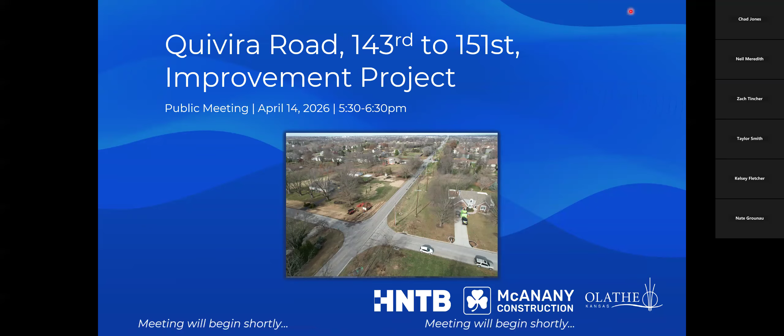Good evening, everybody, and welcome to the pre-construction Meet the Contractor public meeting for the Quivira Road 143rd to 151st Street Improvement Project. This will be the final public meeting before we start construction on this project. Thank you for joining tonight.

My name is Chad Jones. I am the City of Olathe's project manager for this project, and I'm joined tonight by members of our project team. Just as a brief overview of some of the topics that we will be covering tonight, we'll introduce other members of the project team. We will go over the project improvements at a high level. We'll look at traffic impacts that you can expect during construction. We'll take a brief look at the project schedule, and then we'll also have time to answer any questions that you may have at the end of this presentation.

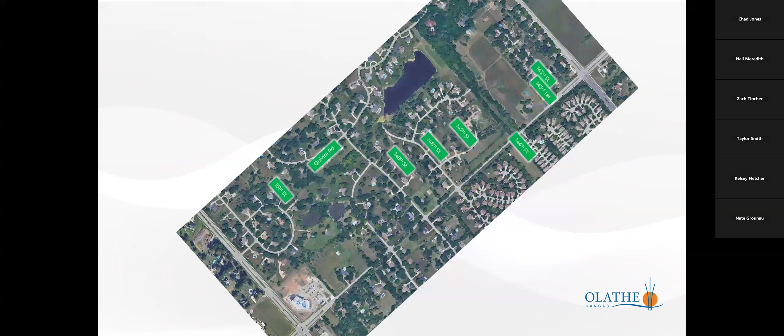Now we're going to take a look at the sequencing of the project. In previous public meetings, we did discuss sequencing moving from south to north. However, after we selected our contractor, we had some discussions on just efficiency of construction, and the city approved a request from McAnany to move from north to south in 2 phases rather than 3. So the first phase will be from just north of 147th Street and up to 143rd Street. And phase 2 will be the south 2/3 of a mile from 151st Street to 147th Street. With this change, there will be some small adjustments to some of the traffic impacts, and we'll discuss those as we move through this slideshow.

147th Street west of Quivira is kind of a unique situation in that they don't have additional roadways to access surrounding streets to exit the neighborhood without using Quivira. So to remedy this, a temporary access road will be constructed at this location to allow residents to exit onto the now complete phase one and head north to 143rd Street. We recognize that in order to do this, phase one will have to be stopped just a little bit short from construction of curb and gutter and that central median to allow both lanes of traffic to be utilized both north and southbound. Following the conclusion of phase two, when 147th Street is completed, these improvements will be constructed at that time.

Our tentative project schedule is to begin construction starting next Monday, April 20th. This will primarily be to post roadway signage and begin survey staking. Those are some of the first activities you'll see starting next week. And final completion for the project will be in February of 2027. Breaking down the phases, phase one will roughly last from notice to proceed next Monday to the end of August of this year, at which time phase two would begin and last from August 2026 to the end of January 2027, with February, that final completion, utilized for punch list items that need to be addressed. Working hours for this project will be 8:30 a.m. to 4 p.m. Monday through Friday, with Saturday work being permitted if city approval is granted.

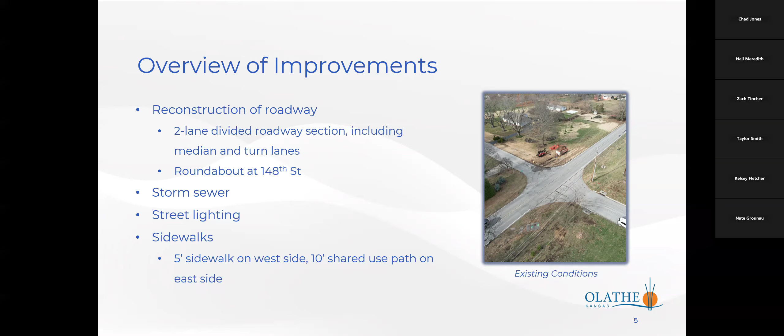To recap the improvements that will be constructed here on Quivira Road, the roadway will be reconstructed from its existing two-lane undivided ditch section roadway to a two-lane divided arterial road with a median, curb and gutter, and turn lanes. A roundabout will also be constructed at 148th Street. An enclosed storm sewer system will be involved to improve stormwater management in the area. Street lighting will be installed in the median, and sidewalks will be constructed on both sides of the road, with a 5-foot sidewalk on the west side of Quivira and a 10-foot wider sidewalk on the east side of Quivira.

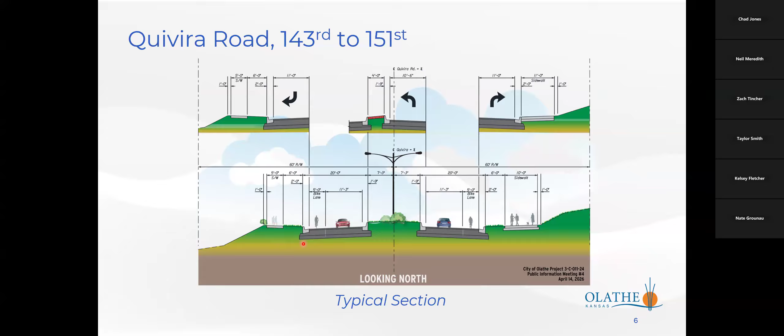Here's a look at what that typical section of the road will be. As discussed, those streetlights will be in the median, which will divide the road with the smaller sidewalk on the west side and the wide sidewalk on the east side of Quivira.

With the closure of Quivira to allow for construction, a detour route over to Pflumm will be posted. For example, if you were traveling north and would typically use Quivira, you would make a left at 151st Street to go to Pflumm and then make a right turn at Pflumm and at 143rd to get back to Quivira and continue north. Similarly, for southbound traffic, a right turn at 143rd Street would be made to head over to Pflumm to get back to Quivira and continue traveling south.

While this is the posted route for Quivira traffic north and south, we recognize that many residents will utilize local streets and their networks to get to their destinations and use those for travel, maybe rather than utilizing this posted detour.

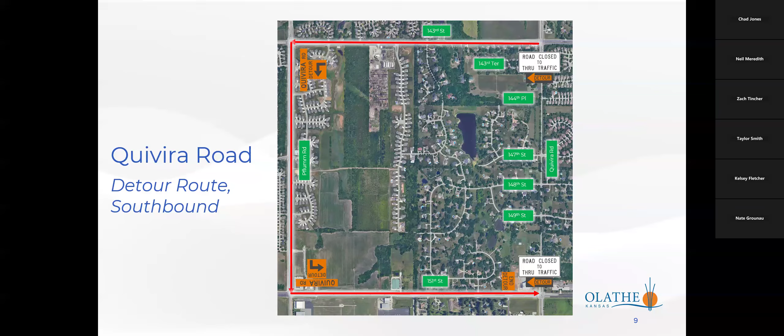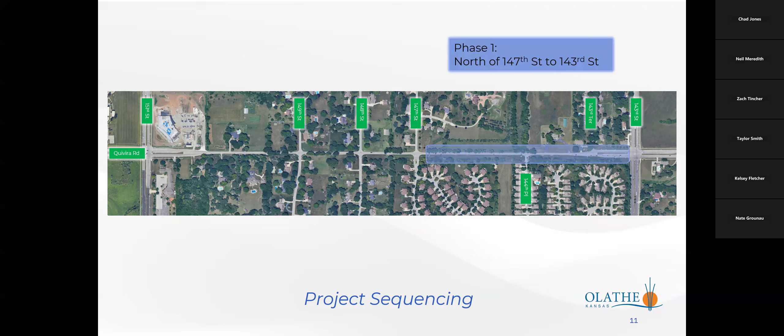Next, we'll discuss the sequencing of construction that'll happen for this project. If you've been present at meetings in the past, we previously discussed this being constructed from south to north. However, after conversations and consideration at the request of McAnany for project construction efficiency, we have rephased this from north to south. And rather than 3 phases, it will only be 2. The first phase will be here at the north end of the Quivira project area from just north of 147th Street to 143rd Street, with phase 2 being from 151st Street to that same north point, just north of 147th Street.

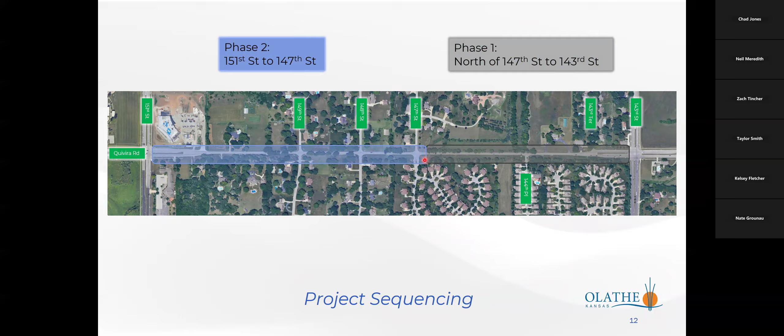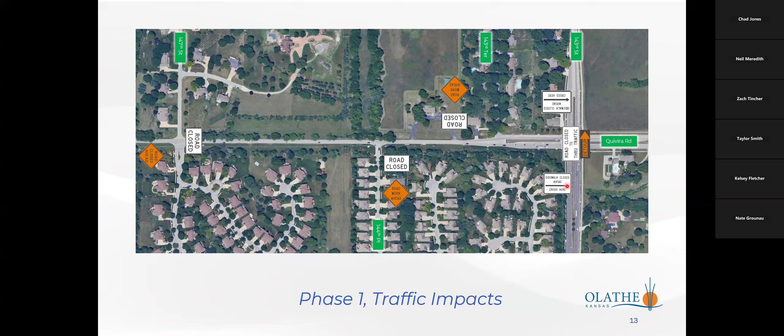Now we'll look at each phase individually and some of the traffic impacts that you can expect during construction. Here's just a simplified signage plan showing where road closure signs will be posted and where detour routing will be posted for both vehicles and pedestrians.

So with phase 1, here's the final constructed project improvements overlaid on an aerial. Residents at 143rd Terrace will still be able to access the 143rd Street signal during construction to avoid having to drive through a construction zone to the south. That median won't be constructed until the end of phase 1 to allow that access to remain. This resident at 14410 Quivira will have maintained access to 144th Place with limited full closures depending on construction activities.

And then Ashford Villa residents there on the east side of Quivira will use that local street network to the east to access 143rd Street or 151st Street. Following the completion of phase 1, the residents at 143rd Terrace and 14410 Quivira will be able to use a U-turn movement aided by this bump out to provide more room for that movement to access the 143rd Street intersection and the signal to the north.

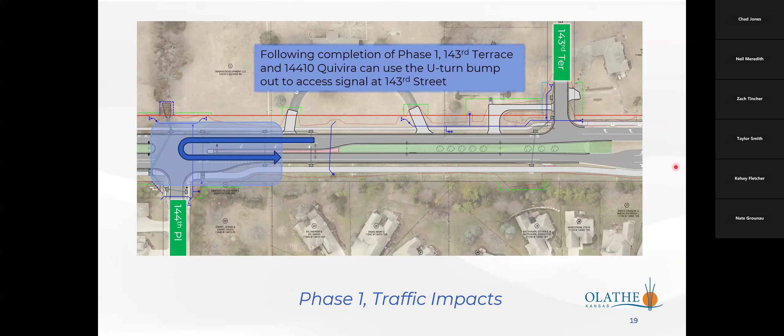Next, we'll look at some of the traffic impacts that you can expect during phase 2. Similar to phase 1, here's an overview of some of the signage and where road closure signs will be posted, and detours for pedestrians and vehicles.

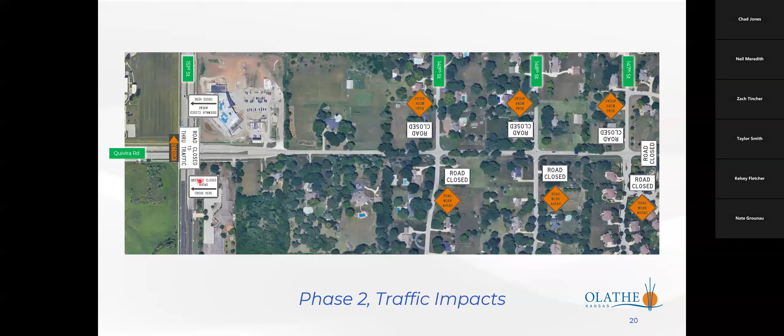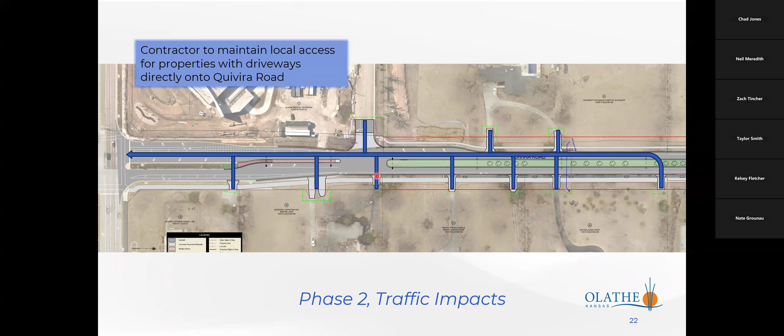Here's that same exhibit showing the project improvements on an existing aerial. Residents who only have access to Quivira without a local street network will have maintained access to 151st Street that our contractor provides. Again, depending on construction activities, this may be impacted, and our contractor or the city will be coordinating with individuals when we are aware of those forthcoming.

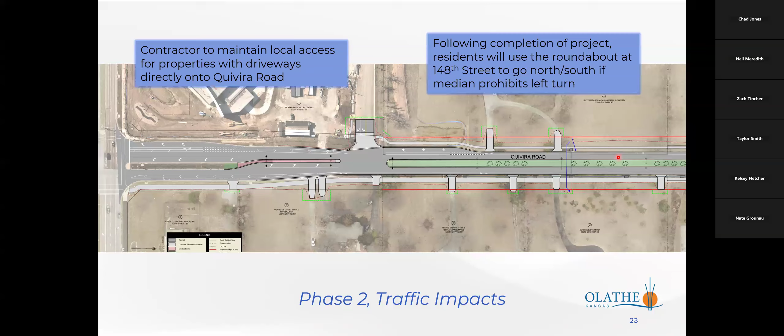Following the completion of the project and the construction of this median, residents will be able to use the roundabout if they're unable to make a left turn due to that median to change their direction of travel.

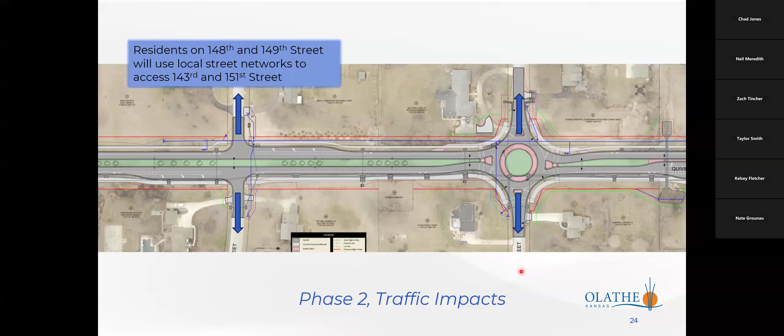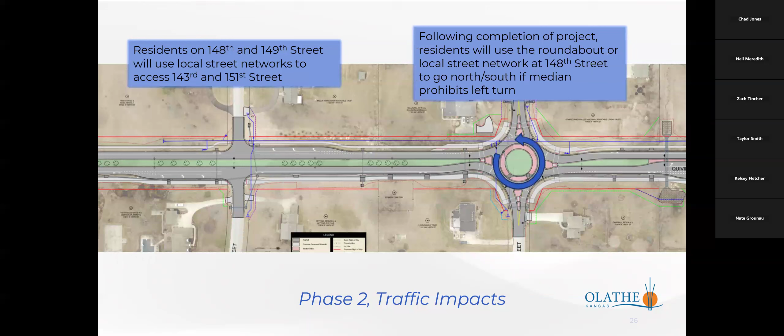During construction of phase 2, residents on 149th and 148th Street will utilize those local neighborhood streets to access 151st or 143rd Street and not have to impact the construction area. And then following the completion of phase 2 in the project, the roundabout again can be used to change your direction of travel north to south if you are unable to make a left due to that median.

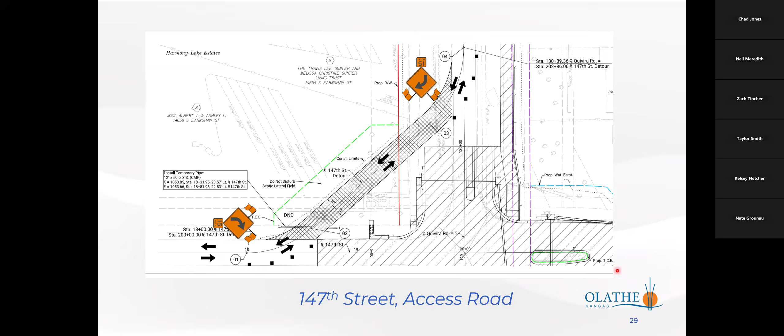Next, we'll discuss our tentative project schedule. Our contractor, McAnany, will have notice to proceed next Monday, April 20th, and their final completion will be in February of 2027. Phase 1 will begin at that notice to proceed date, next Monday the 20th, and will last until the end of August 2026.

Phase 2 will pick up at the conclusion of Phase 1 and last from August 2026 to January 2027. You'll notice that's a little earlier than our final completion date, and that just allows time for punch list items to be addressed by our contractor.

Working hours throughout construction will be 8:30 a.m. to 4 p.m. Monday through Friday, and Saturday work will be permitted with city approval as necessary.

Some upcoming construction activities you can expect for Phase 1 are the placement of detour signage and traffic control signage. Currently, there are message boards displaying and alerting motorists to the upcoming closure. Clearing and grubbing of trees and shrubs, and then water line and storm sewer installation, will all occur prior to the demolition of the existing roadway pavement and construction of the new road.

Phase 2 will have some activities that can occur prior to the completion of Phase 1. These activities will be confined to things that can be constructed or removed during or off the roadway to not impact the Phase 2 pavement. So that'll be primarily clearing and grubbing and installation of water line.

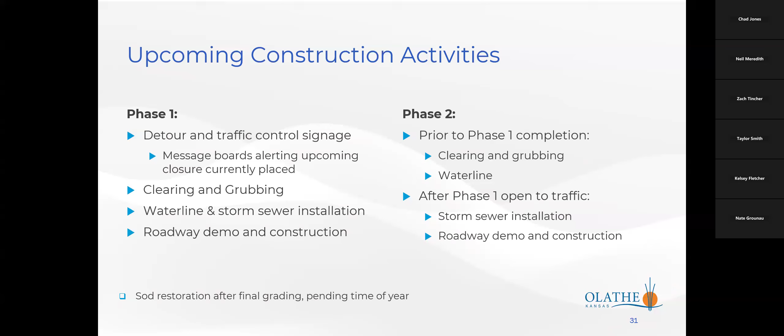Sod will be installed at all areas that our contractor disturbs or grades, and that'll occur after final grading, and that'll depend also on the time of year. The city has approved planting windows for sod, so depending on when construction is completed, it may be outside those windows, at which point our contractor would temporarily seed the area to establish plants for erosion control. And then when the next sod window opened, they would come back and install that sod.

Thank you all for joining tonight to learn about the upcoming construction to Quivira Road and how it'll impact your neighborhoods or your directions of travel.

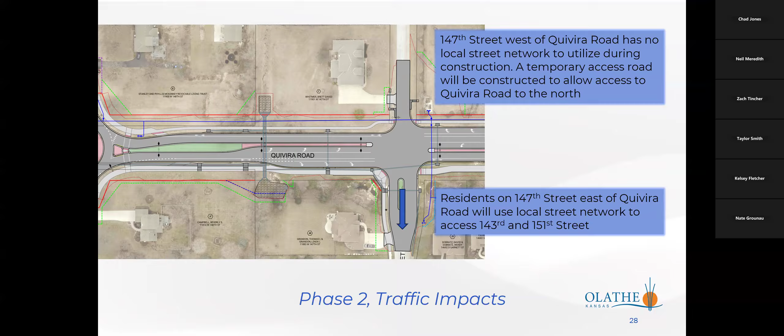So wider areas will be sodded, and then where it narrows up, where turn lanes are, that'll be brick pavers rather than stamped. My apologies.

We have a question on closure for phase one beginning the 21st. That's correct. Those message boards are accurate, and McAnany will begin clearing and grubbing activities and closing the phase one portion of the road to everyone except local traffic beginning on Tuesday, the 21st.

We have a question on a roadway profile concern at 147th Street where there's a sight issue. That was picked up during our design and communicated to us by several residents during the design portion of this project, and it has been improved with the new profile of the roadway to improve sight distance and safety in that area.